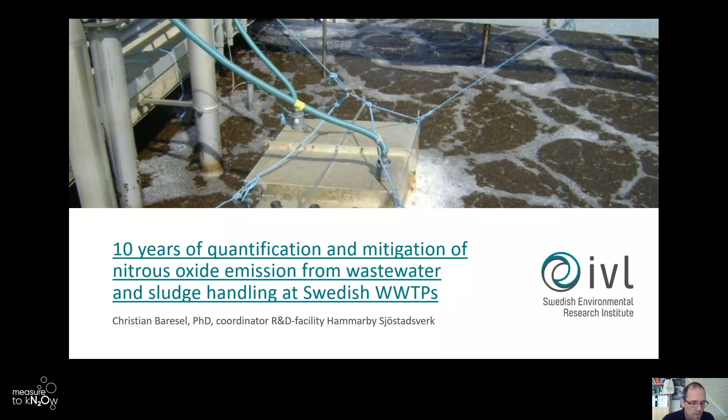Now you can all see my slides? Yes, we see it well. Perfect. Okay, as I was already introduced, my name is Christian Baresel. I'm facility manager and coordinator for our pilot facility in Stockholm, Hammarby Sjöstadsverk, where we, since 2008, are testing with the help of different pilots new technologies within wastewater treatment, water reuse, sludge handling, and so on.

And I would like to share some of our experiences with the greenhouse gas emissions. We have been working with that since the start at our pilot facility, more or less. And I would like to put up some aspects that relate to the greenhouse gas emission, and mainly with the focus of nitrous oxide emissions, of course, and how we implement that into our work and the different projects we have.

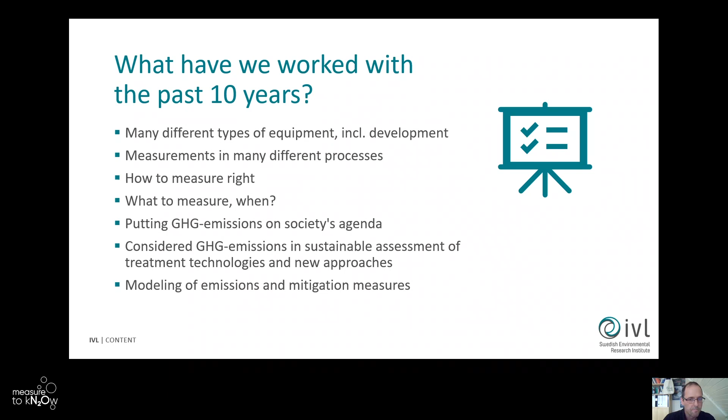But first, I would like to go back a bit. I don't know how many of you have been working with greenhouse gas emission measurements, but if you look back like 12 years back, then it wasn't really a happy time for us measuring greenhouse gas emission.

It was quite often frustrating, extremely time consuming. The equipment wasn't in a state that was suitable for the environment and the wastewater treatment, I would say. You needed extensive pre-treatment of your samples. You were more or less continuously calibrating the instruments, zeroing them. So it was really a huge amount of work just to do some simple measurements. The data handling at that time wasn't that easy either.

And then often the results were also quite limited, as we had high uncertainties and response times that were really long and so on. And some of the equipment was quite fragile.

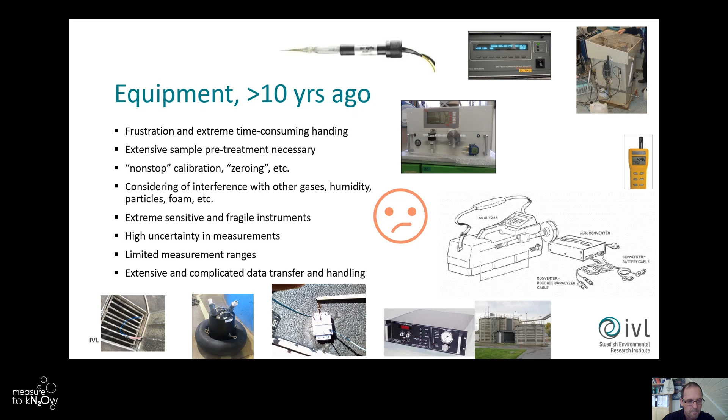We have some instruments, so analyzers, that don't need any sample preparation anymore. They automatically compensate for interferences with other gases and with the humidity. So we have really much improved conditions for going out and measuring greenhouse gas emissions.

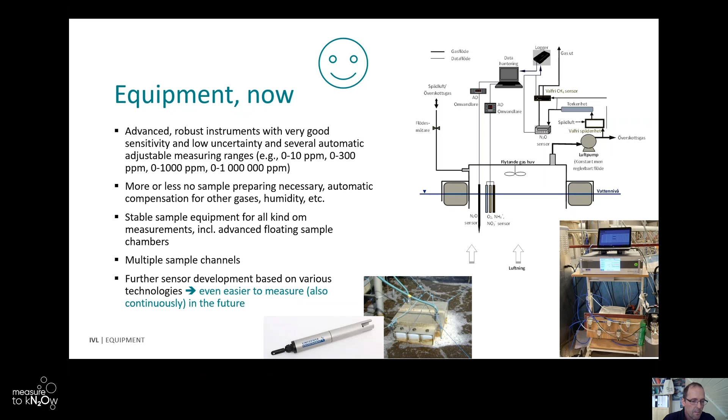Sludge handling, of course, often has methane emissions that are more important, but we also have nitrous oxide emissions in the sludge handling process, when it's stored or if it's spread on agricultural land, for example, which is the common way in Sweden. We have the greenhouse gas emissions there as well.

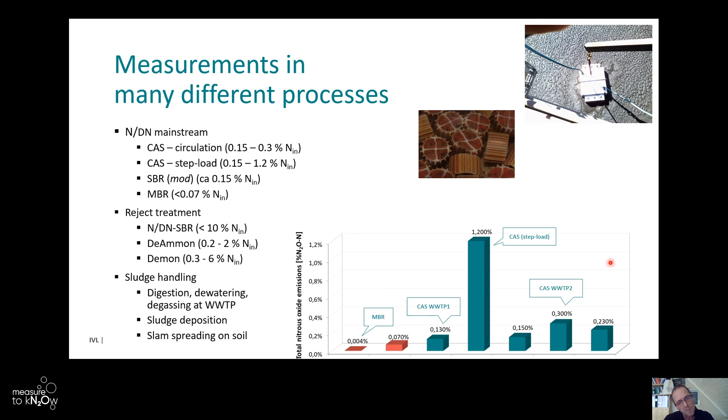As I mentioned before, nowadays the instruments are quite advanced and robust, so more or less everyone can buy an instrument that is really good at measuring, for example, nitrous oxide emissions. But the main thing is not that you have one, and not everyone should just buy an instrument and measure. It's not that easy to measure emissions anyhow.

In Sweden, we have some facilities that are placed inside the mountain, so there it's quite easy to measure the total emissions by measuring in the ventilation shaft. But that's not the normal case in Sweden either. So you have to go out and measure on open basins, and then you use a sampling hood, for example, shown here. And then it's quite important where you measure. You need a good understanding of the process and also of the processes leading to the formation of nitrous oxide.

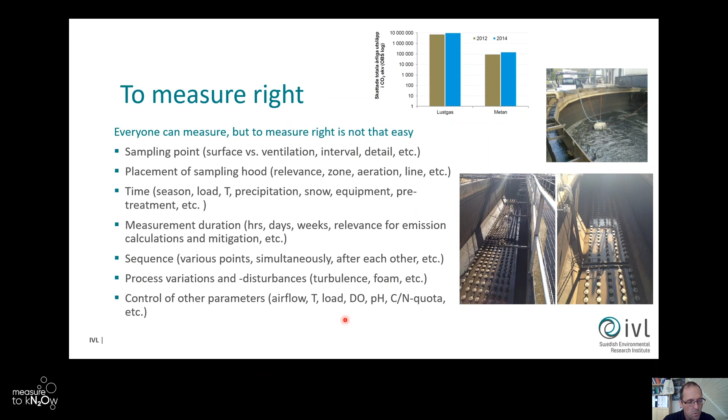If we come to what to measure and where, when we started with emission measurements many years ago, we were really into measuring everything. We spent an enormous amount of time measuring in different parts of a process, which requires quite advanced equipment if you really want to measure very low nitrous oxide concentrations, also in anoxic zones.

But the formation in the process is, of course, very important. If you want to mitigate the emission, you need to understand when the nitrous oxide is formed and when it's consumed. The main challenge is not that nitrous oxide is produced in the process. It's only a problem if it's not consumed again. So there you need to have measurements also in the water phase to understand these processes, especially if you want to adapt, for example, the control strategies in your process.

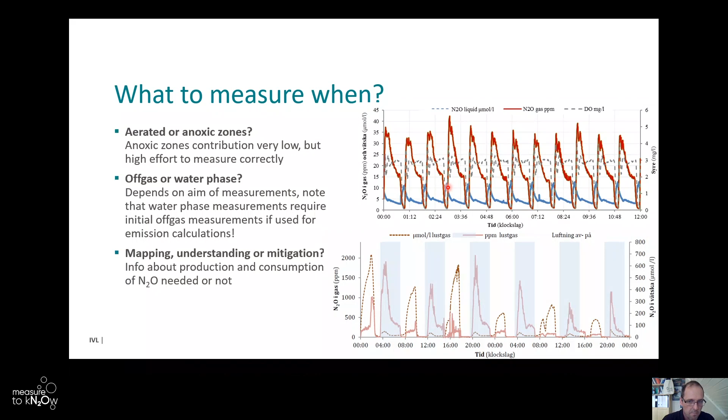We have then done studies, for example, with the Unisense water sensor at one treatment plant in the Stockholm area, Bromma, the second largest treatment plant in the Stockholm area, which is a facility placed inside the mountain. We used the ventilation of one single process line, measuring the emissions from the complete line, and placed one water sensor in the basin. Then we used these two measurements to adjust the parameters in the model you can put on top of the water sensor measurements in order to calculate the total emissions.

And you have some of these model parameters, you have to adjust them in order that the model fits to the actual location you are measuring it. And that we were doing, and then you see in the figure here, if you really have adjusted your model, you can use the water sensor that is just like any other sensor placed in the water line to really calculate the total emission, and it follows the actual emissions quite good.

But if you don't have a good adjustment of your parameters in the model, it can show totally different things as well. So really important there to understand that you can measure the concentrations in the water, but in order to calculate the emissions, it's important that your model is right for your location where you're measuring.

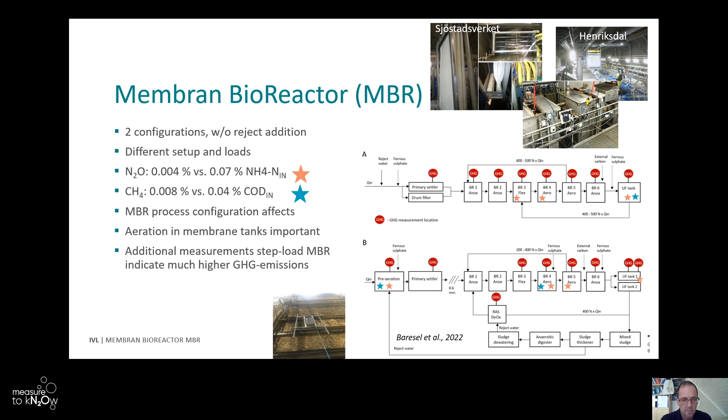We have been working with the implementation of the greenhouse gases in different projects we are working with. We have for many years, together with Xylem, developed different treatment facilities for the reuse of water. We have developed 8 different treatment systems, which are in full scale at many places around the world now. Both for the reuse for drinking water, reuse for groundwater recharge, industrial reuse, but also for agriculture applications, for irrigation.

And there something that we found out is, for example, that if you only have a partial nitrogen removal, which from the sense of the water reuse is really attractive, and also the costs for the treatment are lowered. So generally it's believed that it's also from the environmental impact perspective, it's much favorable, but actually it isn't. The greenhouse gas emission in such reuse application eats up all the benefits of the partial removal and the irrigation benefits, unfortunately.

So it's actually better to treat the water to a higher water quality and then use it for different purposes, also for irrigation, because otherwise the greenhouse gas emission really stand for a really huge environmental impact of these reuse applications. And that is something that I think also today is not really considered in the planning also in the European Union for increasing the treatment for agriculture reuse.

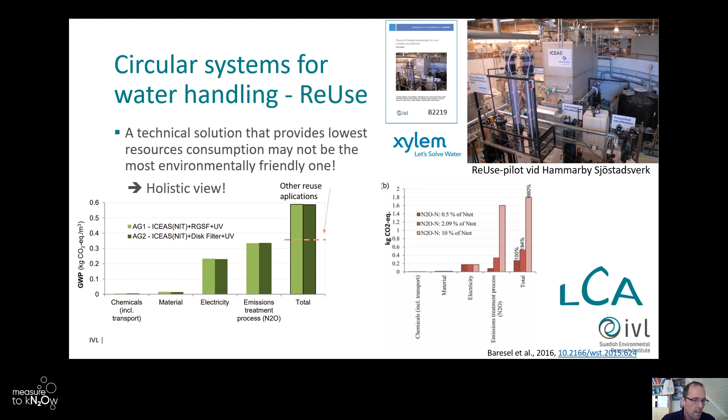We also work together with treatment plants in the development of new strategies. How can these greenhouse gas emissions be taken into consideration for further development? Here, a treatment plant south of Stockholm, Syvab, where we have been doing measurements for many, many years. You see here, if you look at the global balance for the treatment plant, both the indirect and direct emissions from the treatment plant, you see that the actual emissions from the nitrogen removal are the main impact, the nitrification process approximately 60%, and the supernatant treatment 40%.

But of course, also the sludge handling has some impact. On the positive side, the treatment plant is producing biogas, upgrading the biogas and replacing fossil fuel in the Stockholm area. So we have a huge positive effect. And the treatment plant is only using green electricity, which is of course also an impact. And you see, if you look at the total emissions for an inhabitant in the Stockholm area, the wastewater treatment only accounts for 1% of the total emissions. So it may seem a smaller part, but for the treatment plant, we still talk about huge emissions.

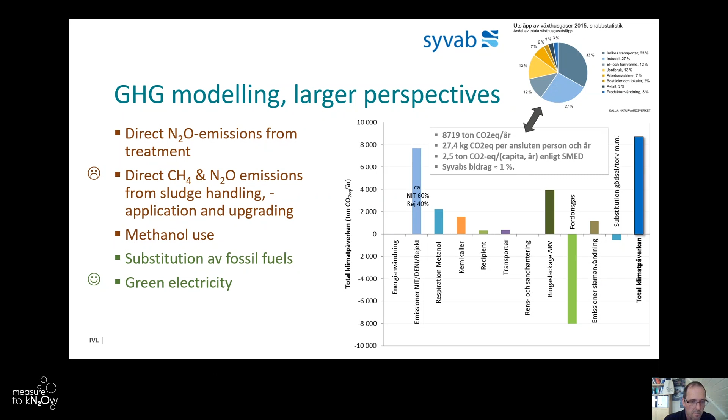If you then look at the further development of that treatment plant, that is one of the treatment plants that is reconstructed right now. We did a comparison, and here you see different scenarios. We see the one based on our measurements. We see one here, for example, where we had inhibition of the nitrification process in several lines. You see that the emissions directly increase quite a lot. If we only take reported literature values, you see that the treatment plant has much lower emission values. So literature values are a good starting point if you have no measurements, but you really should do emission measurements.

We also see different other impacts, how you can develop the treatment plant in order to decrease that climate impact. And we see that we also have scenarios, which are now also implemented, where the treatment plant becomes climate neutral. And here we are not talking about taking in external organic waste. If you just increase the amount of external organic waste, increase your biogas production, and by that compensate for fossil fuel, then every treatment plant can be climate neutral. But if you don't consider that as the easier way, you still can do that.

And then my final slide, the system perspective, a really important aspect I would like to bring up. We have been working with LCA in all other projects, all the time. And it's really important that you have the holistic view. So if we, for example, look at the treatment plant for reuse in Spain, and you try to reduce the environmental impact by, for example, decreasing the energy consumption by 10%, you get some effect. But at the same time, if you use a different energy mix, the changes are much larger. So don't start to sub-optimize a process to gain some smaller benefits if you can do something else that is more important. And also the greenhouse gas emissions are only one environmental impact.

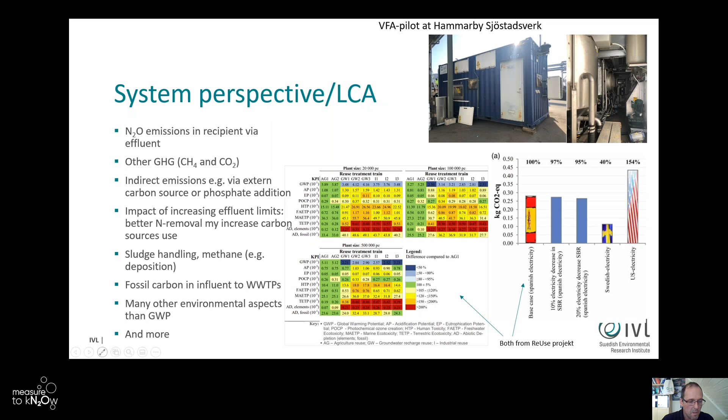Thanks a lot, Christian. Thanks for a great presentation. Great overview of that, really extensive body of research. Really nice to see all these results from different categories. I'm looking at the chat right now. I don't see any questions in the chat. If anyone would like to ask a question, please raise your hand.

There, I've got one. Erik Christian Heyer, please unmute and ask your question. Yes, hello, this is Eric from Novafos in Denmark.

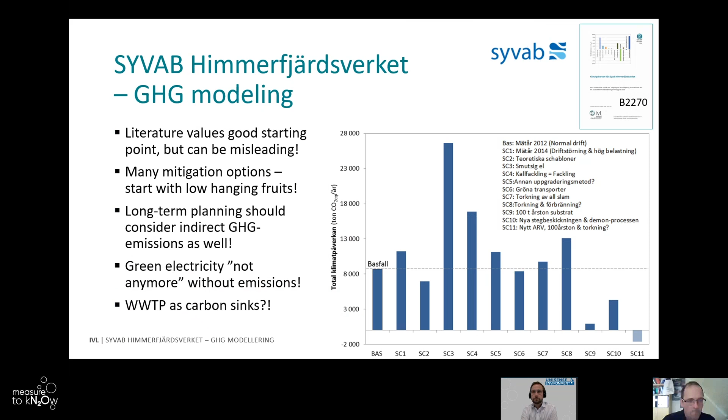One of your slides showed that it was necessary to make off-gas measurements even though you want to install water-based measurement equipment. I think it was 1 or 2 slides earlier than this. Could you elaborate on that? Can't you do it with just the water-based nitrous oxide measurement? No, you can't.

Now, of course, Unisense, you can discuss that later on, one-to-one as well. Yeah, it's your product. But what we see is that you can measure accurately the concentration in the water phase, and you can do that with just a sensor. But if you want to calculate the total emissions of nitrous oxide from your complete process, you have several parameters going into that model. Of course, not only the basin dimensions, but the KLA, the transfer coefficients. All these parameters have to be adapted so that your model predicts the correct emissions.

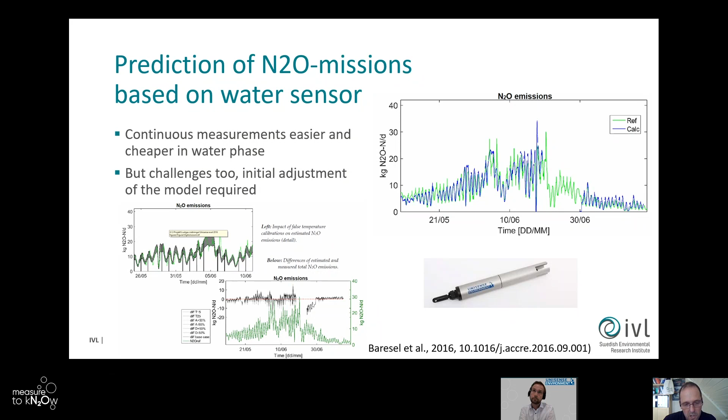And what we have done in that paper, for example, is investigate how these different parameters affect how well the model predicts the actual emissions. And as I said, here we had the advantage that we can measure the emissions from the whole process, so we are quite sure. The same was true here. The PhD student was only using the water sensor to do all the experiments with the pH control. But first, after we adjusted the model for this specific reactor and sensor, we had to do the off-gas measurements in order to adapt the model. And then when we knew it was working right, we could remove the off-gas measurements.

And we actually did it after a half year of the testing period. We did just follow-up measurements, and we saw that the model still fitted without any problem. But the initial adjustment of the model parameters was necessary in order to know that the model put on the sensor is predicting the correct emissions. So it's important that you differentiate between measuring a concentration, which is what the sensor does, and the model calculation based on these concentration measurements that calculates the total emissions.

I see a response there from Mikkel. I'm going to allow that one as a last, and there were two other questions, Floris and Aprilia. Please type them in the chat, and then I will pass them on to Christian afterwards, if that's all right. For time constraints, we can only take this one here.

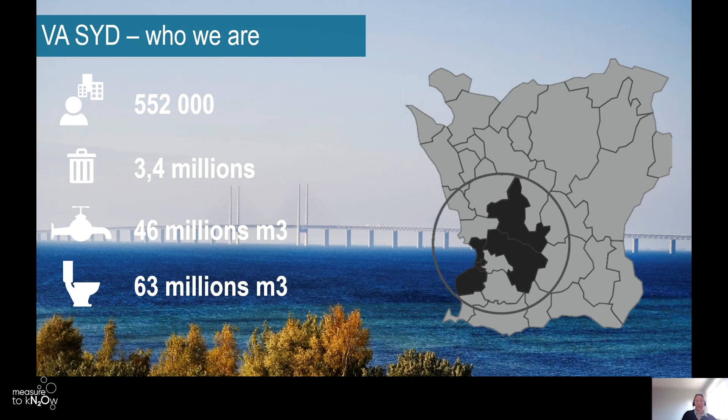We have roughly 500,000 customers, and we provide them with drinking water, and we take care of the wastewater from our customers. And in some of these municipalities, we also take care of the waste and recycle the waste. And some years ago, VA SYD took on 6 organizational goals, and one of these goals is that we should be carbon neutral and energy positive by

2030. And that's really why we are interested in measuring our greenhouse gas emissions. And of course, this has been a driver for both starting to calculate our emissions, which we have done. And this greenhouse gas accounting has also been like a starter and an eye-opening, I think, for a lot of people within VA SYD when they have realized from where our greenhouse gas emissions come within the organization.

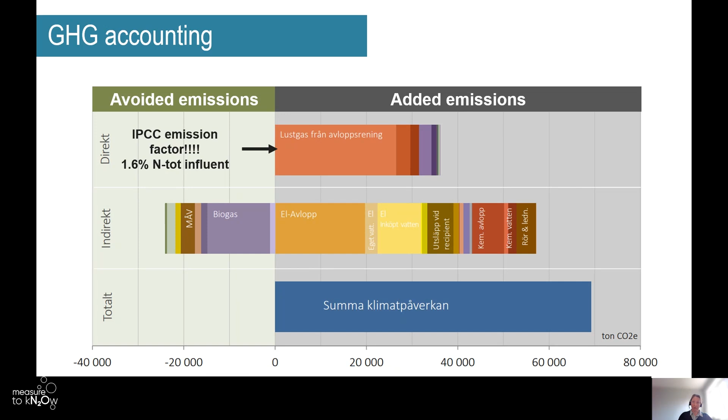So in total, we have an annual carbon footprint corresponding to roughly 70,000 tons CO2 equivalents. And the wastewater treatment is really contributing to this carbon footprint. We have nitrous oxide that is produced in the wastewater treatment line. It's roughly 30%. And then we have the electricity that we use at our wastewater treatment plants. That's also a big chunk here, as well as the chemicals that we are using at our wastewater treatment plants. And then a quite big chunk here is also the methane slip that we have from our sludge handling processes.

And when these calculations have been done, it's only based on emission factors. And what we can see here is that we use an IPCC emission factor of 1.6% of the total influent nitrogen when we calculate this. And we have realized, since we have this big chunk of our carbon footprint that seems to originate from the wastewater treatment line, we really need to check if this is valid or if it's worse. So that's how we started this project of measuring our greenhouse gas emissions.

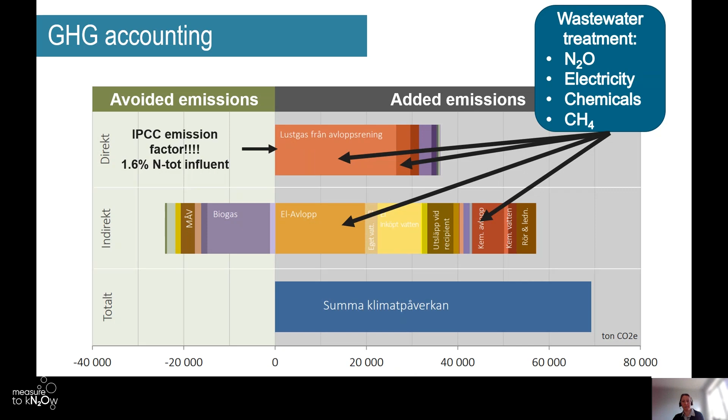We started our project last year. We purchased this equipment and it got delivered in July 2021, so we haven't had it for that long. And what we have is an electrical cabinet that we can move around on the wastewater treatment plant. And inside this cabinet, we have a gas analyzer where we measure nitrous oxide, carbon dioxide, methane, and oxygen. And connected to the cabinet, we have Unisense sensors that we can use in the water phase. We have 2 of them.

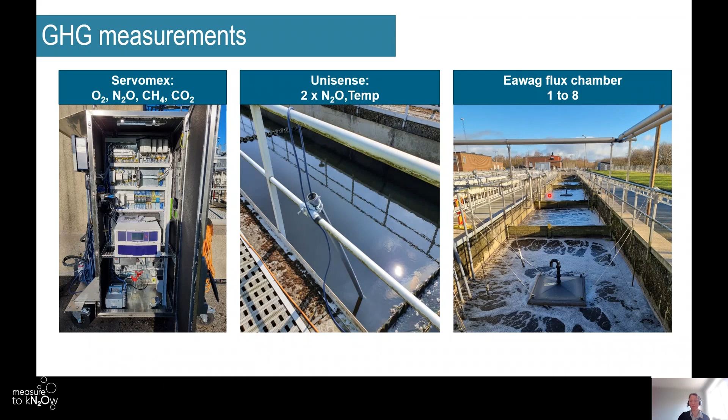And we also have flux chamber hoods that we have produced based on drawings that EAWAG from Zurich were very nice to give to us. So we have 8 of these hoods that we can use, so we can have up to 8 measurements, not at the same time, but this is what the setup looks like. So we have these valves that Christian also was talking about, 3-way valves, and we have a purge pump that's purging from all but one of these hoods all the time. And then the off-gas sample is going into the off-gas analyzer from one of these off-gas hoods at a time.

And before the sample is going into the analyzer, it's pre-conditioned. And then, as I said, we have those additional sensors from Unisense. And we also have just regular sensors to check on the process conditions like pH, ORP, and ammonium, and so on. So that's the system that we use.

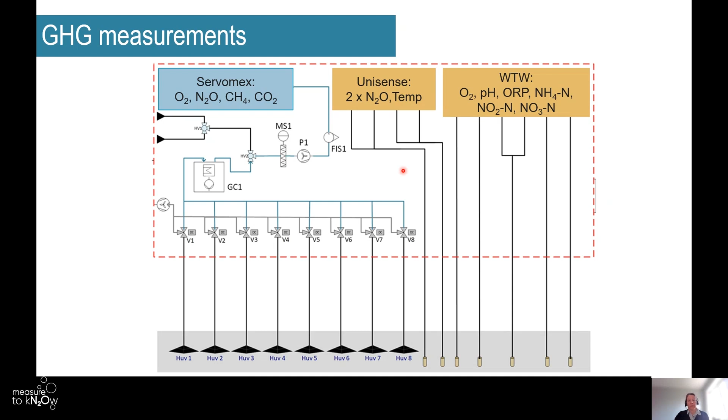And we decided to start this out at Klagshamn wastewater treatment plant that's located in Malmö. We chose this treatment plant because it's quite small. It has a neat and easy configuration compared to Sjölunda, for example, which is really complicated. So we have inlet screens here, and after that we have a sand trap where we add iron chloride for pre-precipitation in the pre-sedimentation tanks.

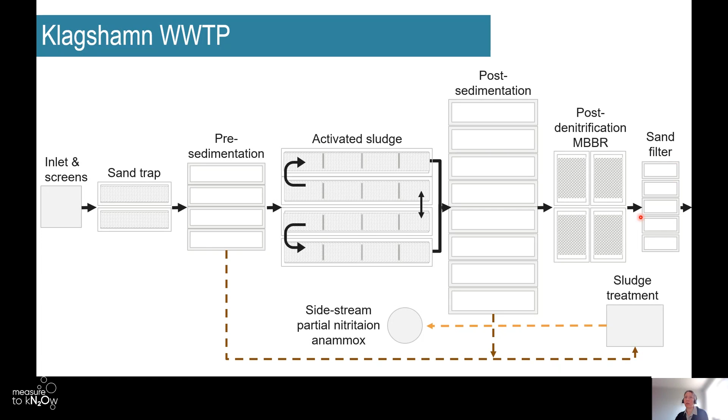After that, the wastewater continues into the activated sludge line where we have both BOD removal and nitrogen removal. And the activated sludge is separated in the post-sedimentation tanks, and sludge from both the pre-sedimentation and post-sedimentation is going into the sludge handling, and the reject water from that is going back to a side stream partial nitritation anammox. And after post-sedimentation, the final nitrogen removal takes place in our post-denitrification MBBR. And after that, we have a final polishing step as a sand filter, and here we can also use some iron chloride if we want to precipitate some more phosphorus before we let the effluent out to the recipient.

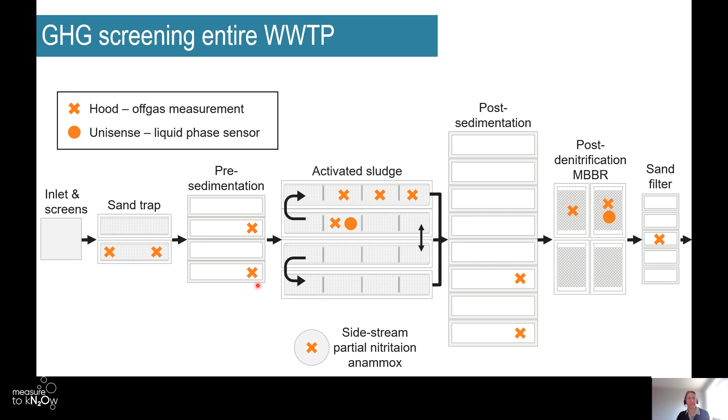And what we wanted to do first of all was to map how the emissions were divided in our wastewater treatment plant. As Christian said, we were suspecting the activated sludge and the side stream nitritation anammox to have a huge impact on the total emissions. But we wanted to check all our treatment steps so that no recirculation or anything like that gave us any unexpected emissions.

The result is that we have the largest nitrous oxide emissions in the activated sludge process, and this was measured during summertime, where roughly 30 kilograms of nitrous oxide is emitted per day. The methane emissions are fairly small in comparison to the nitrous oxide emissions, and the only place where we really have some methane emissions is in the first treatment step, which is the aerated sand trap.

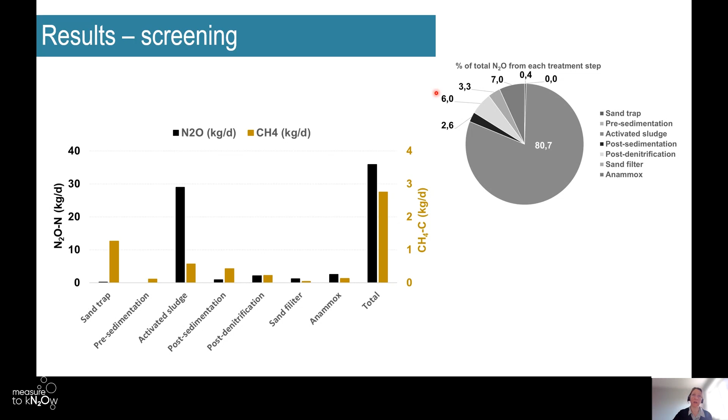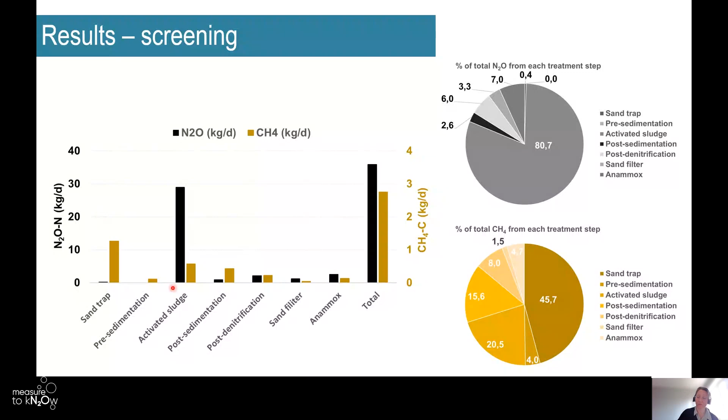After that, there is not really any methane. And I think it is quite clear that roughly 81% of the total nitrous oxide emissions comes from the activated sludge, and then we have 6% from the post-denitrification and roughly 7% from the anammox reactor. And regarding the methane emissions, roughly 46% comes from the sand trap, and the rest from the other treatment steps.

But when we calculate the carbon footprint, or the percentage of nitrous oxide and methane of the total carbon footprint, it's really evident that 99% of the direct emissions is due to nitrous oxide emissions. So these small methane emissions are not very important for us if we want to do something about the emissions that we have.

What we are also interested in, of course, is to compare the emission factor at our wastewater treatment plant, since we use a calculation factor of 1.6% in our greenhouse gas accounting at the moment. But what we have seen during the summertime measurements is a factor closer to 3% of the influent, and that is actually twice as high as the emission factor that we use today. If it's like this at all our wastewater treatment plants at VA Syd, that would mean that we would rapidly increase our carbon footprint to a large extent.

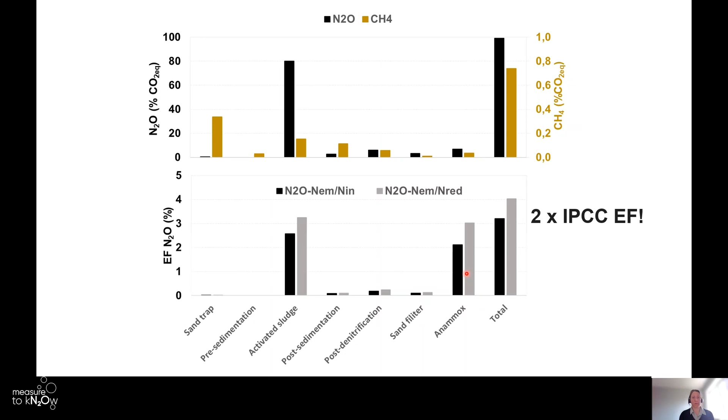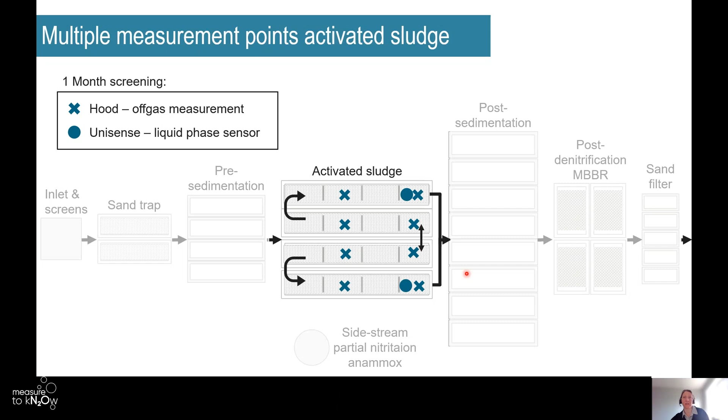And as a second part of this project, we have been screening the activated sludge plant because, as we heard before, these emissions are not going to be equal all over the activated sludge line. They are probably changing, and with changing I mean that they will not be the same in the inlet and the outlet. And we chose to put 4 hoods in one of each activated sludge trains to see what this gave us.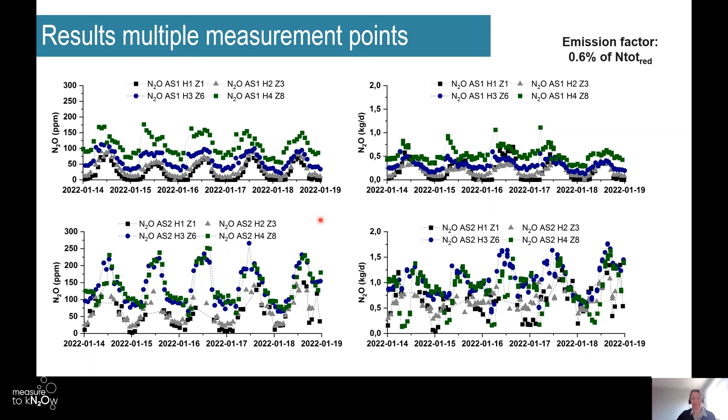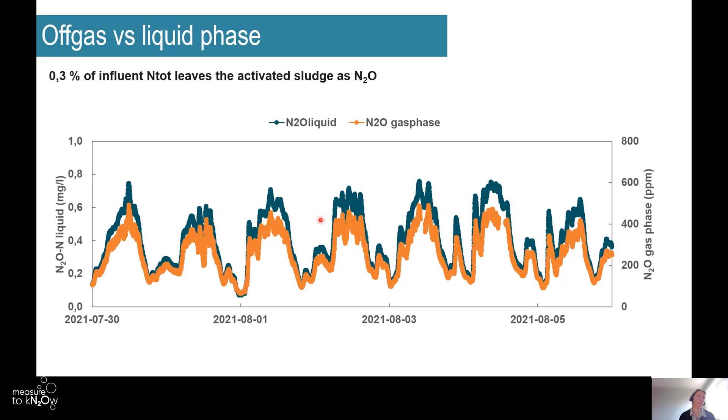And these measurements were performed during winter, and we actually have much lower emissions during these months, with an emission factor corresponding to only 0.6% of the nitrogen reduced. So that's quite a big difference between summer and winter time. And then we are also interested in how much nitrous oxide is leaving the reactor with the effluent, and here it's roughly 0.3%. We always have this nice correlation between the off-gas measurements and the liquid phase.

And if we would like to use the sensor in one of the zones where we don't have a sensor, we could always use this kind of correlation, and we can also calculate KLA when we know that we have a measurement. So that's also something that we would like to do. And the nice thing with the sensor is that we will always be able to keep track of where nitrous oxide is produced versus where it's emitted.

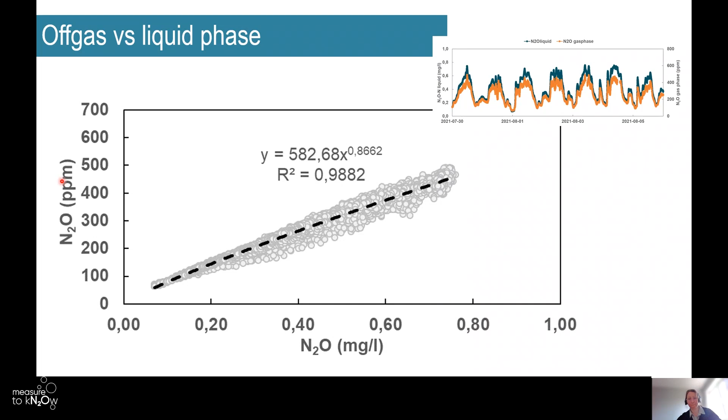So the conclusions that we can draw until now are that the nitrous oxide emissions stand for 99% of our direct carbon footprint at Klagshamn's wastewater treatment plant. And we have an emission factor of 3.2% of the incoming total nitrogen. And this would really increase our carbon footprint if we compare it to the IPCC emission factor that we are using in our greenhouse gas accounting right now.

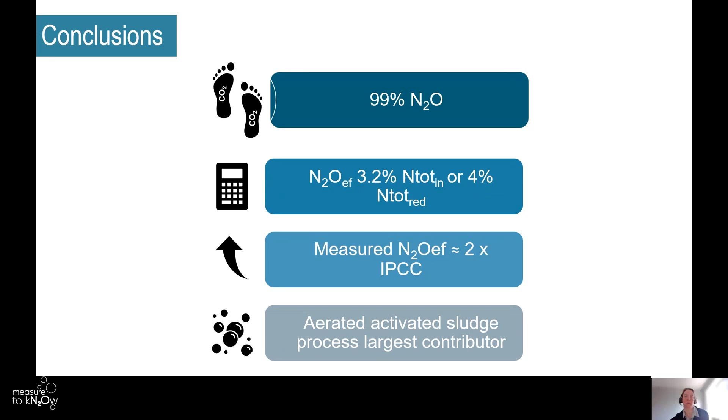And quite as we expected, the aerated activated sludge process is the largest contributor, and that's really where we should focus our further measurements. And what we would like to do next is to gather long-term data.

Sarah, we lost your sound. Yeah, Sarah, we don't hear you anymore. Now we're back. We just lost the last minute because there was a delay. Maybe you could just go back and repeat that, please.

Yeah, so we would like to have the long-term data set, since we have seen those differences, and I think that's also what's really pointed out in literature: to be able to say that you have an emission factor that amounts to a certain percentage of your influent nitrogen, you really need to have a long-term data set. And we would like to continue this data analysis that we have started, and use this as an input for a modeling study where we would emphasize mitigation strategies, and hopefully we will have a collaboration with Lund University on this.

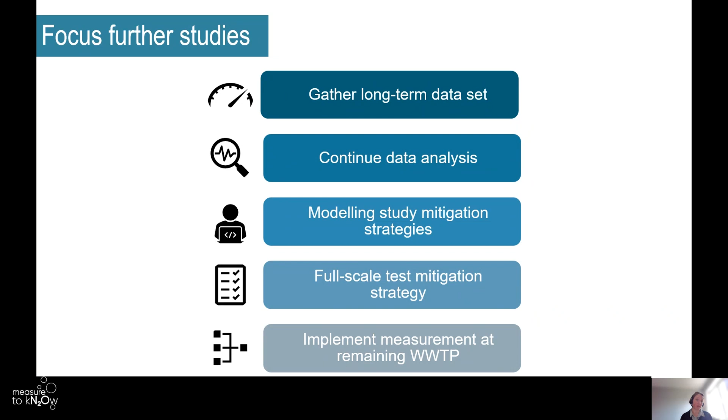And what we really would like that modeling study to give us is some kind of full-scale operation strategies that we could test at Klagshamn wastewater treatment plant. And after that, we also need to implement our measurements at the remaining plants, because now we are at one wastewater treatment plant and we have 5 that's quite large, and then we have also a whole lot on the countryside. But we will focus on the bigger centralized wastewater treatment plants for now, I think. Yep. Thank you.

Thanks very much, Sara, for this great overview and exciting research and exciting journey ahead still. While it's of course alarming to find these high emission factors, I think it also gives a lot of room for optimization. So you have interesting work ahead, and thanks a lot for sharing that with us. I'm sure that many people can benefit from it. Do we have any questions from the participants or from the speakers as well? Of course, if there are any, please raise your hands.

While people are still thinking, I actually have one myself. You showed very clearly in your activated sludge process that you have most of the emissions towards the end of the zone, which is actually unusual, I think, from what I've seen so far. Usually it is more in the beginning where you have a higher turnover, or the highest turnover of ammonium that you would see, high nitrous oxide. Do you have any indications or any gut feeling, any ideas as to what is going on there?

We think that it's because it's a quite high-loaded plant. So most likely because the emissions are also kind of low in the first zone. So we think that it's only BOD that's actually being oxidized in the first part of the activated sludge, and then the further away we get from the inlet, the more nitrification is going on. Yeah, okay, that makes good sense.

Just very briefly from the beginning, for those of you who do not know what Hubgrade Performance Plant is, it's optimization as a service. It's a way to control and operate primarily wastewater treatment plants, while focusing on many aspects at the same time during this operation, incorporating water quality, chemical dosing, biological capacity, energy savings, hydraulic capacity, and so on, and of course also CO2 equivalent and carbon footprint. So it's a holistic approach to online control of wastewater treatment plants.

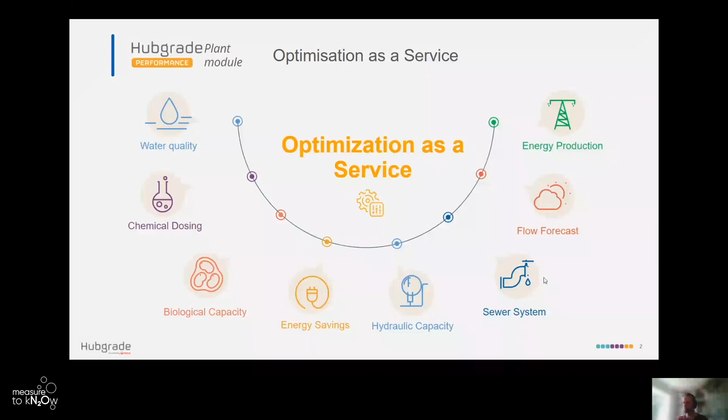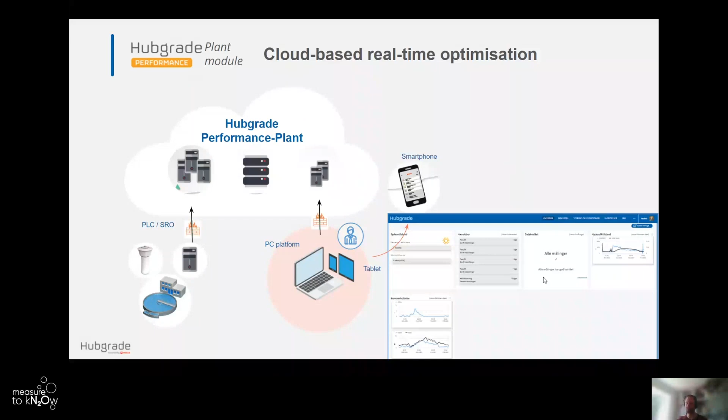It's cloud-based, so the advanced treatment algorithms take place on a cloud-based server and communicate with the PLC or SRO system at the plant to convey these set points for the control. There are many different individual controls that can be selected to fit each and every individual plant. And what's most relevant with the CO2 equivalent here is, of course, secondary treatment as part of the biological process.

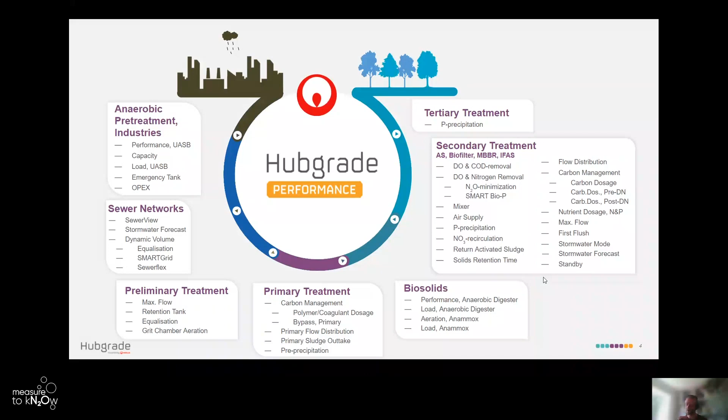There are many full-scale references around the world, so it's a well-tested system that's been operated for many years and just recently moved to be cloud-based. Okay. So what's actually the core of this control is controlling the oxygen set point and the phases or the zones or the aeration duration of these treatment plants. As you can see here in the bottom, we see normal fluctuations between ammonium removal and nitrate production, and this is of course a result of the aeration of the treatment plant.

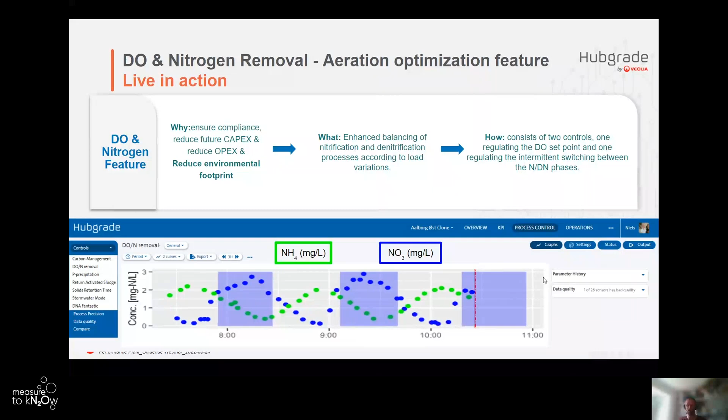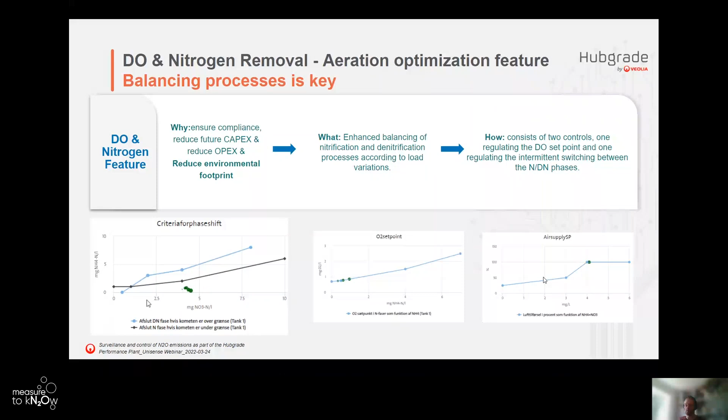The trick is then to balance this to best suit the maximum overall removal of total nitrogen, and to do so with the least energy consumption, and of course also the least N2O production. This control includes criteria for when the nitrification and denitrification phases are engaged and closed, and also creates set points for the DO aeration. As part of this, there is a N2O minimization feature included as a standard part of this product.

When installing a sensor such as the Unisense N2O liquid sensor, a very simple and standardized but very effective and robust control feature is automatically implemented and can be just simply turned on by request. The very essential feature of this control is that when a certain N2O limit is reached, that's set in settings, simply aeration is stopped and denitrification is engaged. And in essence, what this does is that it aborts aeration and it initiates N2O denitrification. So stopping the active emission and thereby stopping the problem, and also removing the cause of the problem by denitrification.

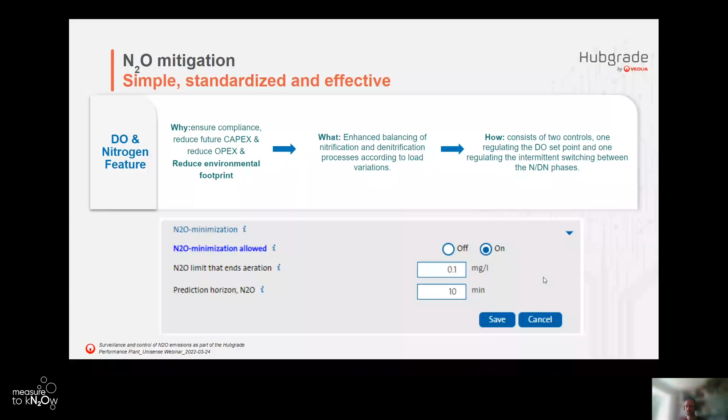So this is quite a simple trick to control N2O emissions that can be applied in almost any wastewater treatment plants, and is very effective and very robust in the way that it works. But that's of course not all, because as we've learned, many parameters affect the N2O emissions of a treatment plant. And here the holistic approach comes into how we control wastewater treatment plants. Because as I just briefly mentioned, the DO and N removal, the control of the phases and the DO set point is very important also in order to balance rates, for instance. The mixer operation is applied to minimize DO gradients and reduce N2O production, and also facilitate denitrification as an N2O sink.

Similarly, solid retention time control adapts sludge age to actual loads and capacity of the plant, and balancing the appropriate amount of sludge in the treatment plant to the actual load of the plant is also a key parameter in order to minimize N2O production. Return activated sludge control: increase hydrolysis at the bottom of the settler and in the tubing, minimize nitrate return, both to facilitate denitrification as a sink to N2O. The recirculation for those plants also is a control to balance the nitrate concentrations and facilitate denitrification as an N2O sink. Finally, the carbon management: if that's in lack and you have problems with insufficient denitrification, carbon addition is a way to complete the nitrogen removal and facilitate removal of the root cause of emissions, right? The actual liquid N2O concentrations. So all of these act together in a holistic way to overall minimize the N2O production and emission from a treatment plant.

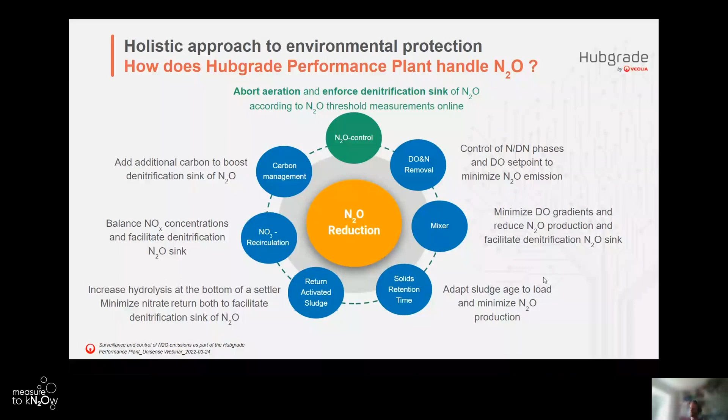This right here is an example from a treatment plant in Denmark, where we did a very brief test to illustrate here the effect of this very direct control to N2O mitigation, where aeration is aborted and denitrification initiated when a certain limit value to the liquid N2O concentration has been reached. And on the top here, you see the N2O concentrations in the liquid phase, and in the bottom below, you see the activation of this control feature, the N2O mitigation feature. And in the green framed circles, this control has been activated, so we've crossed a certain threshold limit with N2O in the liquid phase, and this activates the control feature, which then aborts aeration and initiates denitrification.

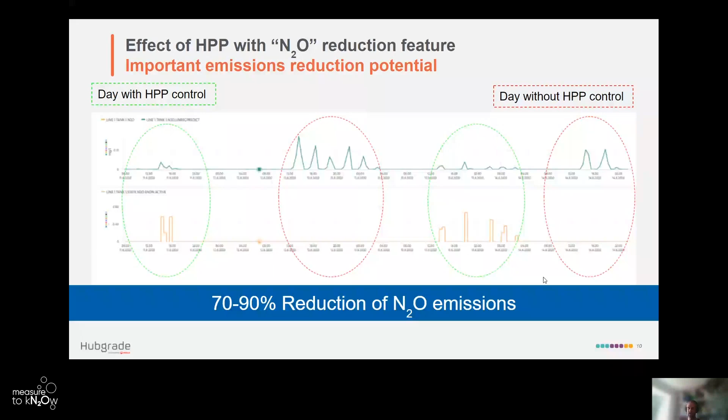And so here in the green phases, you have smaller peaks in the N2O liquid phase, whereas in the red ones, where you do not have this activation of the control, the peaks are higher, and thereby also emissions are higher. In this specific case right here, we saw reduction potentials of up to 70 to 90% of this right here.

We've been talking also about emissions and emission factors. As part of this product, we have a standardized solution to also calculate the N2O emissions based on the excellent work that Unisense has done on this. And based on their guidelines, we use this in the online control to do the calculations of the actual emissions.

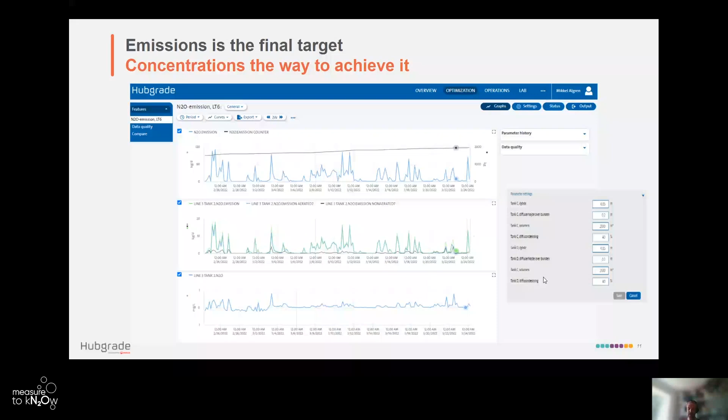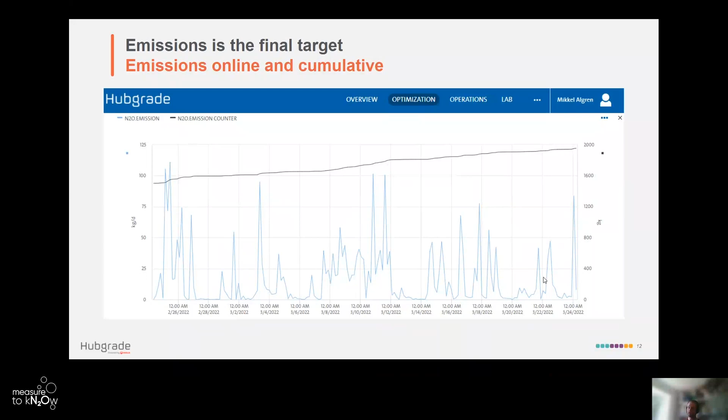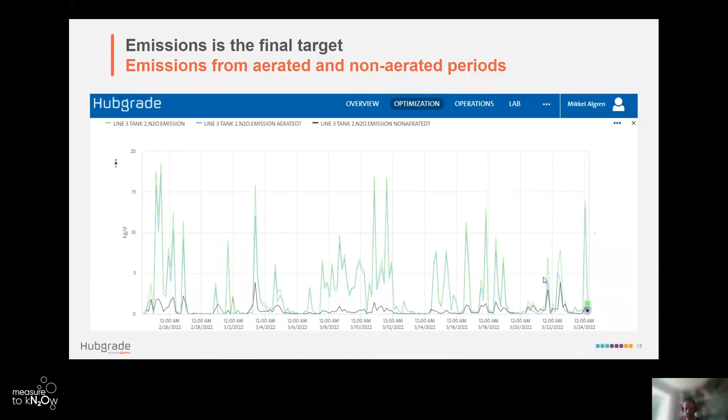This here is an overview, and in essence, the needed settings are just put in as part of the user interface, covering tank depth and diffuser area and stuff like this. To zoom in right here, we see an example of the actual emissions online and the cumulative emissions over time. We also have a division into emissions depending on whether you have emissions in the aerated periods or the non-aerated periods. And finally, you have, of course, the actual N2O concentration measurements in the tank. So all of these things together to keep track.

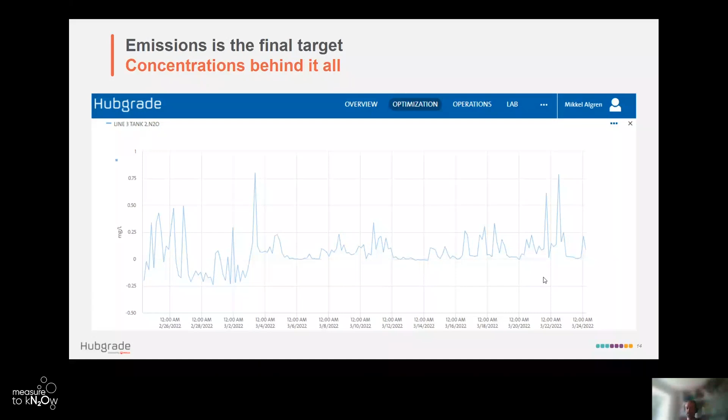We, of course, want to further improve the control opportunities that we have to offer in addition to this N2O mitigation with the N-phase abort function. And we are currently involved in several research projects to develop this further. One is what we call the biokin in DNA Fantastic, where we actually use DNA measurements of the microbial communities of such a system to connect with the biokinetic performance of the plant, and using this for control of activities of the nitrifiers in the plant to maximize nitrogen removal, but minimizing N2O production.

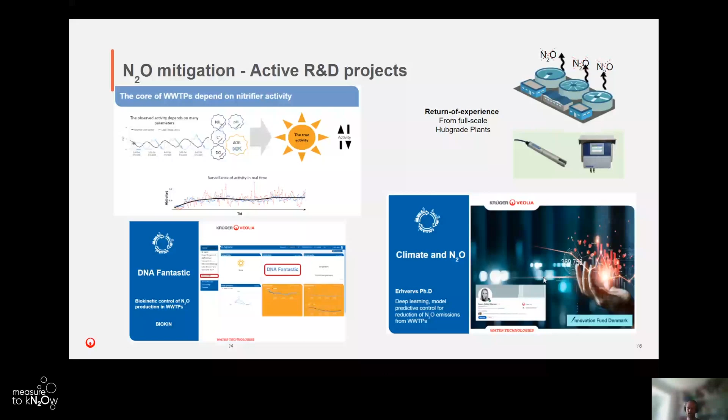In another project, we developed deep learning artificial intelligence tools to be able to predict N2O production into the future. So we will be better prepared to control and mitigate the future N2O production and even improve the control based on that. That's my time spot right here. I'll invite any questions from the audience.

Thanks very much, Mikkel. Yeah, no worries. Wonderful presentation. Thanks a lot for giving us these insights. I will look at the chat for questions. Don't see any right now, but probably people are still coming up with them.

I have a question that I'm curious about. Krüger is, of course, a Danish company within Veolia as a global company, global player. And Denmark, as we know, is sort of at the forefront also legislation-wise in nitrous oxide. Maybe you can elaborate a little bit on how the adoption of this module specifically in Hubgrade is coming forward in Denmark and maybe in other countries, and what your ideas are for the future. What your feeling is, where and which drivers there will be in other places in the world to adopt this.

Yeah, interesting question, and very relevant. Also, one of the challenges that the climate has is the drivers in the regulatory sectors, right, around the world. There's a lot of interest on N2O. Many places around the world, they recognize that this is an important parameter to look into and to develop controls for. Drivers are few around the world still, especially economic drivers, right? So it's mostly strategic, ethical drivers that push clients and collaborators to do activities in this. Veolia has taken upon, because they also operate a lot of plants around the world.

For the last 4 years, there's actually been a big push here in Denmark to gather more data on greenhouse gas emission, especially nitrous oxide. And from 2018 to 2020, we had a nationwide monitoring campaign running over 2 years, where both big and smaller plants were monitored, measuring nitrous oxide using both our equipment, but also off-gas equipment in some cases. And the goal of this was to actually improve the national emission factor that we in the UN system are obliged to provide data for to the IPCC global CO2 footprint reports.

And what was found, and what has already been said by other presenters here, is that first of all, the nitrous oxide is really varying between different plants, but more also the deammonification type of processes comes out as really a high emission type of process. Another learning that we had was that it's actually the bigger wastewater treatment plants here, the two of the three bigger plants around Copenhagen, they have emission factors that are sometimes much higher than even the new emission factor in Denmark. So the point really is to monitor for a long time and actually monitor every wastewater treatment plant in order to know what the emissions will be.

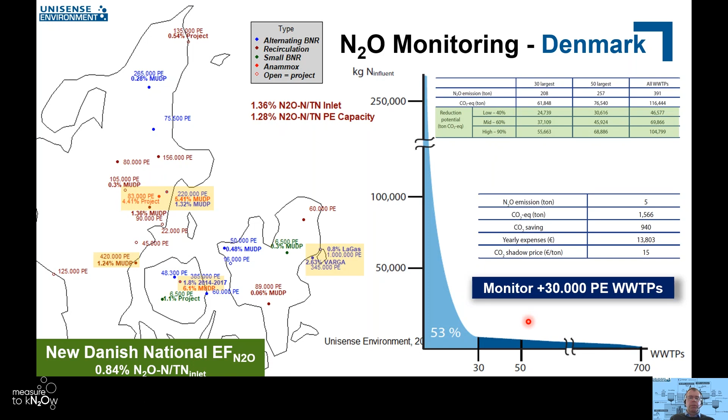One of the key parameters, and I guess many of you are process engineers, is actually energy consumption, which is actually one of the bigger carbon footprints, unless the power is green. That saving is actually coming from advanced process control. And these advanced process controls, as you've seen before, are actually also the same that we need to mitigate nitrous oxide. So carry this with you as a take home, that actually power savings is also coming from efficient and advanced process control systems, and only around 30% are coming from buying new equipment. And there are several big vendors that have actually done these analysis and shown that the savings are also coming from the controllability of their equipment.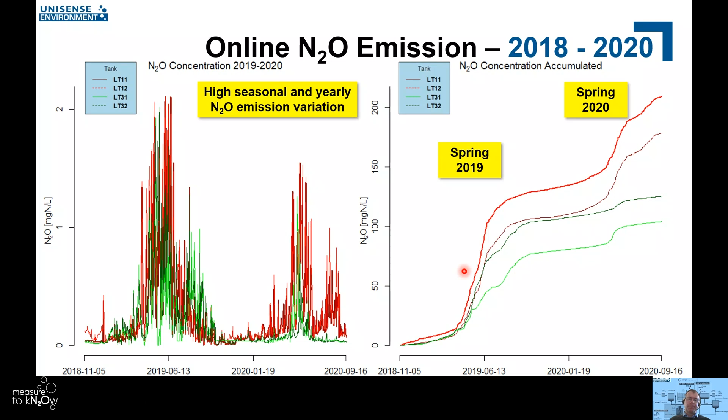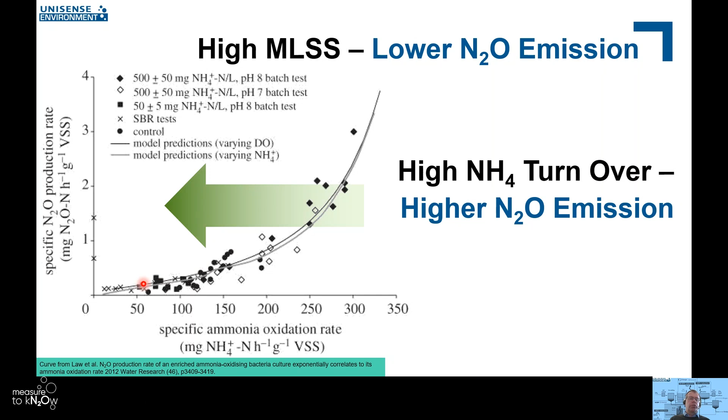So one key element, and that was actually mentioned before by Ellen from Royal Haskoning, is that it's well proven that the amount of ammonium that is turned over per time per gram of activated sludge is really important in terms of the emission. And it's been shown that if we turn over a lot of ammonium in a small volume per time, then we will have a much higher emission compared to one where we have less load on the same amount of sludge. So if we have high SS, so high bacteria content in the tank, then we will actually lower the substrate concentration and consumption per volume, and then we will also get a lower emission.

And we actually tested this in full scale for a whole spring in 2020. And here you can see the cumulative emission in 2 tanks of 4, and the red ones here are the ones where we didn't change the SS amount. And you can see the green one here is then the SS content, which was just kept 0.5 to 1 gram per liter higher compared to the control. And you can immediately see that the emissions are getting quite low from the start, and they actually stay very low.

And then if we also try to optimize in terms of the DO, then we can immediately see that we'll get a response, in this case here, a negative response. So if we start to suffocate the bacteria on top of the reduction of the substrate, then we will actually get higher emissions as well. And then when we return to a normal situation, then we will have more or less the same emission. Here's again the cumulative emissions. So overall, just over this spring, we saved around 80% of the total emission, and that is the equivalent of around 16,000 tons of CO2 equivalents per year that was mitigated by this simple control.

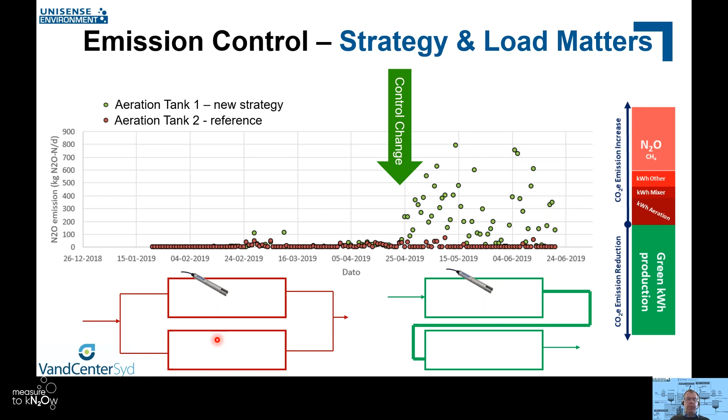And looking at load, this is data now from Vandcenter Syd here in Denmark, where they compared two tanks dividing load compared to two tanks in series, where the first tank takes all of the load and then passes it on to the next. And as you can see, dividing the load into two tanks rather than having a much higher load on one tank shows the same picture as we saw before. The green ones here are where we are having most of the load on the first tank, and you can here see that the emission is significantly higher than if we split the load into several tanks. So load balancing and having higher SS are two really cheap and easy ways to do mitigation.

We have also played with both pilot scale in this case here, but also full scale changes in terms of aeration strategies, and also trying to see if we could get simultaneous nitrification, denitrification to work. And here it's a 2 cubic meter pilot plant. These are data back from 2016, where we first ran an alternating aeration strategy, keeping the ammonia at a steady level, and then after 14 days, we changed to a recirculation strategy where we tried to stimulate both nitrification and denitrification at the same time. And you can see as we lower the DO, we still comply with all effluent values as we should. The nitrous oxide is also much lower, and we actually achieve both an energy saving but also a reduction in the emissions. In this case, around 26%.

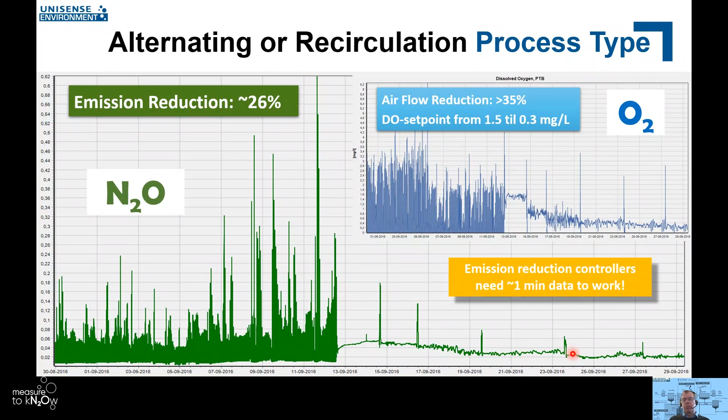And actually, last year we ran this in full scale in an 80,000 PE plant at Skanderborg, where we actually halved the emission and doubled the capacity on the plant by implementing the control that you see here. A key is that we need high controllability in order to maintain this simultaneous nitrification, denitrification process control, because otherwise it will not be steady.

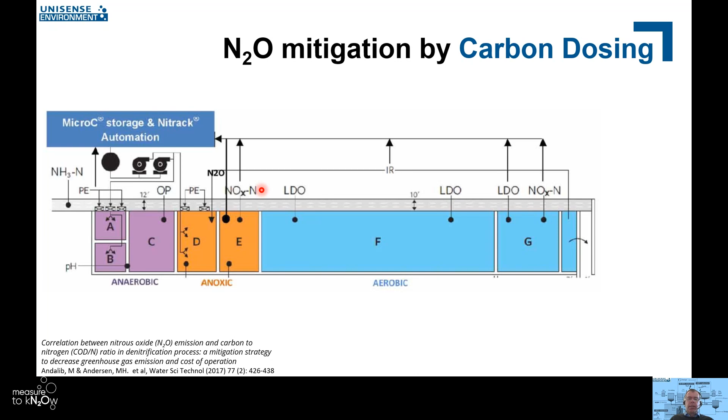We can also use the nitrous oxide sensor to dose carbon, and as you heard Bastian Baresel telling you, internal carbon sources can also be generated. But actually, if you do polishing steps where you use a post-denitrification tank, then you can have a fair bit of emissions of nitrous oxide. But what we showed is that if you measure the nitrous oxide as a function of the COD that you add to the tank, you get a very beautiful picture of the stoichiometry of the denitrification.

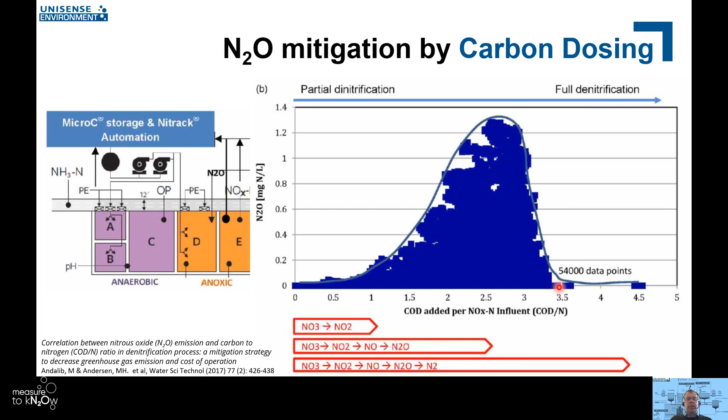And with cell growth, we need around 3.5 molar of COD per mole of N that we remove, and dosing carbon exactly to this shows that the emission then disappears. So carbon dosing using the nitrous oxide sensor is also a possibility. And then one of my last slides, that is for the deammonification.

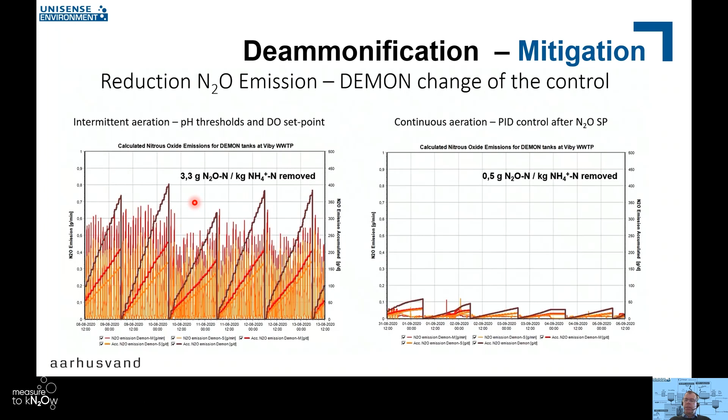This is data from Aarhus Vand, where they changed the classical pH control on a demon plant, and changed the input rather than pH to be a control where they had a simple feedback of the nitrous oxide sensor to the blower, keeping a continuous aeration in check by measuring the amount of nitrous oxide and having a steady aeration. And here they reduced the nitrous oxide emission by a factor of 6 by changing the control strategy.

So in all, together with many of the partners and some presenting here today, we've shown that not only monitoring is possible, but also reductions are possible, both based on the sensor, but also monitoring while you do process optimizations. And these can be very cost effective. And if we do get a carbon tax on CO2 emitted, then this is for certain a go-to solution for decreasing your taxes. And finally, our recommendation is

Sorry. We lost you for 10 seconds. Yeah, I just need to get back on my slides, I cannot click on them right now. You are on your last slide. Okay, I just couldn't see it. So our recommendation is. Sorry. No, go ahead. Can you hear me?

Yes, I hear you. So reducing energy consumption is of course first, but then the mitigation of nitrous oxide is really the next go-to option before you do anaerobic digestion. If you do anaerobic digestion, then try to produce sustainable energy that can be transported elsewhere, as biomethane or as hydrogen or some other source of energy.

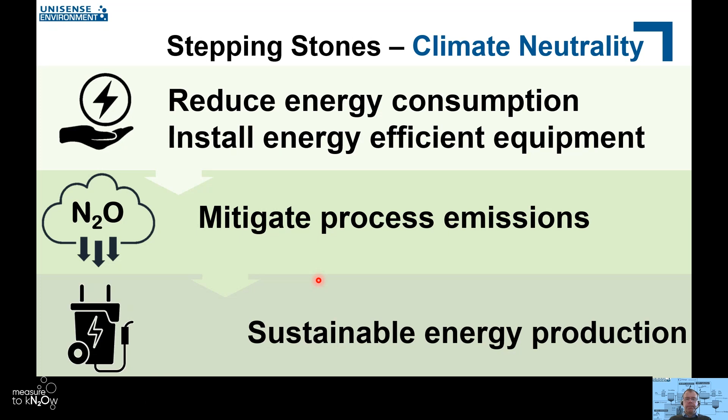So thank you. Thanks very much, Mikkel, for giving that overview. Are there any questions from the audience? If so, please raise your hand. Otherwise, I have a question in my own interest a little bit.

What do you think will be the next 5 to 10 years at Unisense Environment, and how do you see adoption of measuring globally? Well, I'm very much on par with Mikkel that this is largely driven by regulation, and currently the EU framework directive for wastewater is under revision, and here we hope to see that for the water cycle the carbon footprint will be included as part of the goals. But it is also clear that the ability to purify wastewater has a gradient across the world, and we need also to allow developing countries to get up to a standard where sewage is treated energy efficiently but maybe not climate efficiently, because that overall will also reduce the carbon footprint. But I believe in the next 10-year frame we will see that the regulation will be in place in Europe and maybe Northern America and Asia for emissions of greenhouse gases from the water cycle as well.

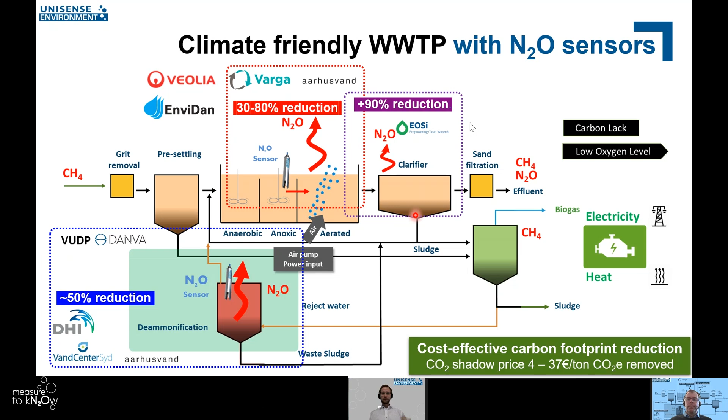Yeah, maybe even carbon taxing could be a strong incentive. That has been shown by many economists. Yes, that is the real driver that will make a change, and we know this from petrol gases and all other types of taxes. So it's a matter of implementation. The pain needs to be felt before big things are moving. But it's great that many people are working on this topic nonetheless, as we've heard, for ethical reasons, for reasons of doing the right thing. I think we have a great example of that today.